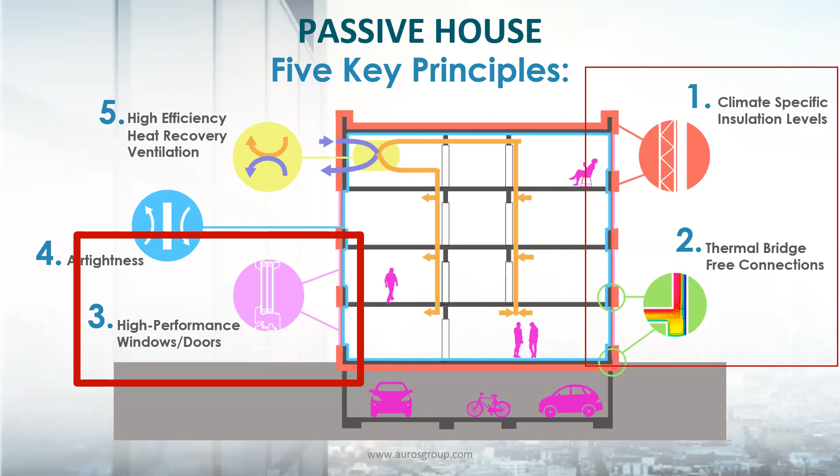And you can see the next ones will be in two weeks and two weeks after that, which will be covering air tightness and then ventilation systems. And we're going to continue the boot camps after session five. We're going to get into PHPP modeling, maybe some subcomponent modeling demonstrations like we did last week with thermal bridge analysis. We'll definitely be getting into some testing, some blower door testing and things of that nature.

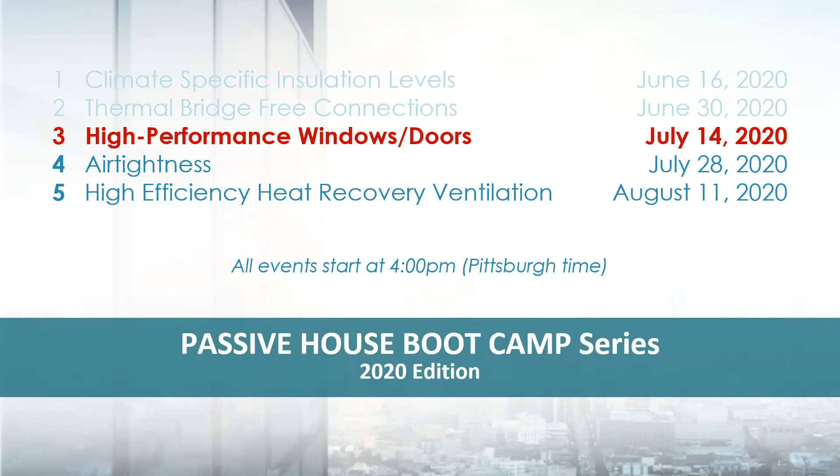Yeah, I mean, our goal here is not to replace the Passive House training course. We're trying to introduce folks to the principles and some of the ideas, let people ask questions mostly, right? We're trying not to do an hour-long presentation.

Chris Hamm is joining us, has volunteered to help us out today. He's from Steven Winter Associates. When we were mulling over how to present windows, we thought we've done manufacturer presentations before, and that's not what we want to do here. We want to talk more holistically about high performance windows.

Chris has this great article. Maybe some have read it. I put it in the invitation to try and spark a little background research and hopefully get some extra questions.

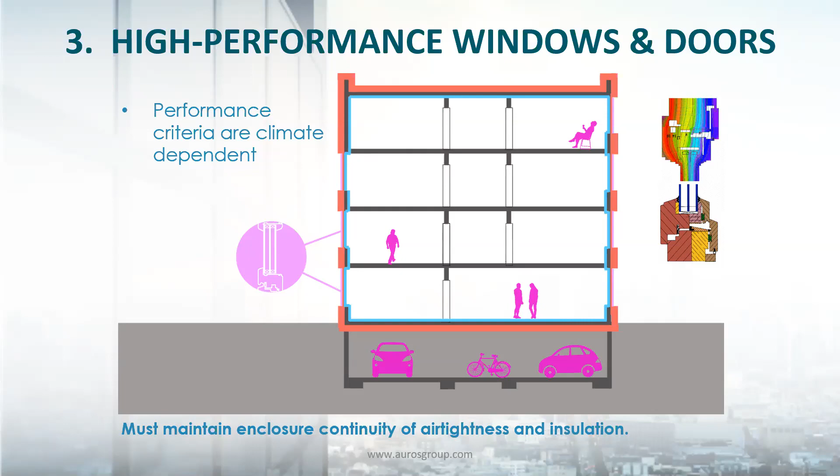Thanks, Jim. Chris, welcome, and thank you for being here with us. Thanks a lot, guys. Can you see my screen first? Yes. And you see the presentation, right? We see it in non-presentation mode. We see the PowerPoint. There you go. Good. Perfect. Great, thanks. So yeah, thanks, Jim and Craig, for having me on.

I'm extremely happy to be joined this week to talk about windows for Passive House construction. I love what you guys are doing here. It sounds like an extremely useful and practical way to get Passive House knowledge out there. So just a little bit of background. I work at Steven Winter Associates in New York City. I am a certified Passive House designer and aspiring mechanical engineer. I've been at Steven Winter for almost 4 years, working exclusively on Passive House projects, mostly large multifamily projects in New York and around the Northeast.

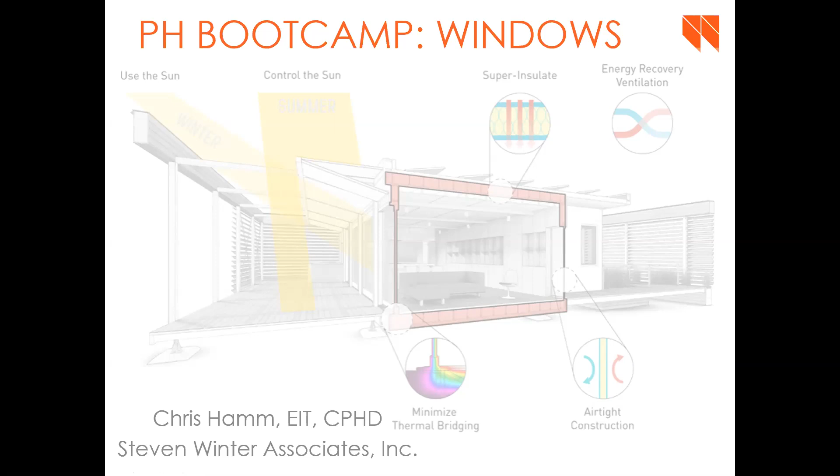A lot of my time is spent doing energy modeling, reviewing drawings, but also doing commissioning and inspecting and air tightness testing during construction. So I'm happy to be talking about windows. I definitely spend a lot of time talking about windows day to day, and we're only going to cover a portion, but we're excited for this discussion.

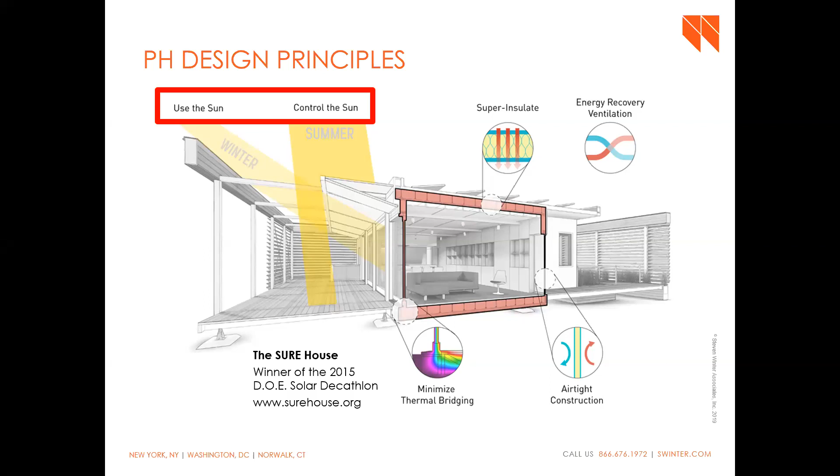But why do we focus on it so much? So we're going to take a step back here. Quick credit, Stevens Institute of Technology logos here. This is actually from a graduate school course taught by Ed May, if you've met him before, who does a lot of the training up here in New York.

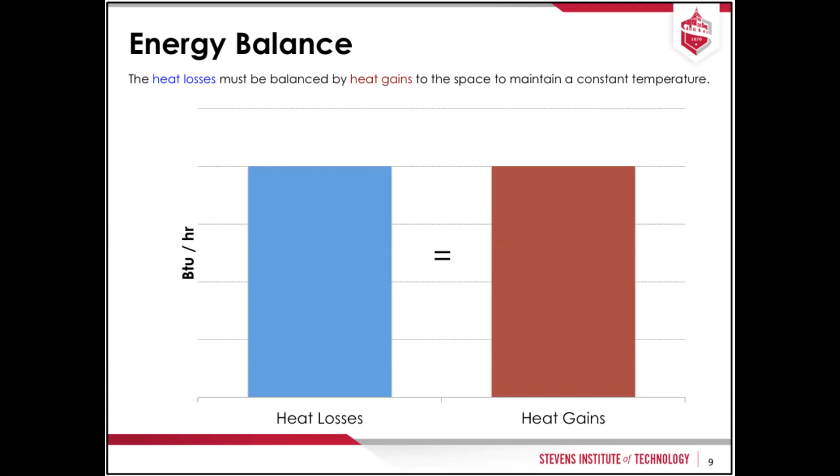When we are designing a Passive House project, and especially in the PHPP, if you're into the modeling side of things, really what we're doing is trying to balance the heat losses with the heat gains in a space, and that's what's required to maintain a constant temperature. Okay, right? I think we all generally get that concept, but that's what's happening when we're designing a building to maintain a constant temperature.

So how do we get heat losses and how do we get heat gains in our building? Heat losses, the main two ways that we think about heat losses are transmission losses, meaning heat conducting through the actual building, and then ventilation losses or infiltration losses, which is actually just air moving out of the building. And so windows play a very big role in that, as you can imagine.

The windows are the weakest part of the envelope thermally. They're going to introduce the most heat loss to your envelope. They, of course, also impact your project in terms of air leakage, and so that also contributes to the losses. But today we're not focusing as much on leakage, although I'd love to come back for another session and talk about that all day. But really what we're talking about today is the heat losses through your windows.

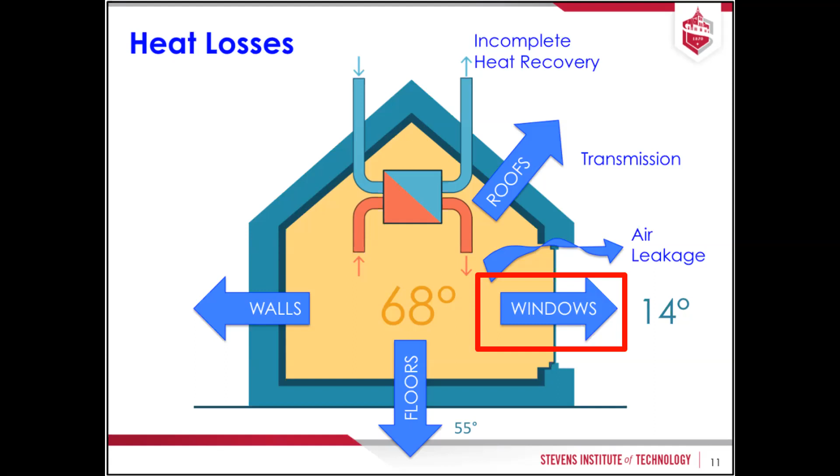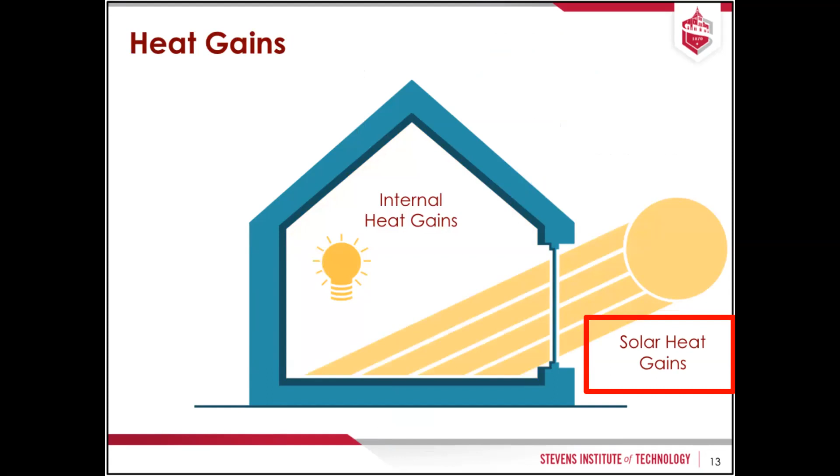In addition, as I mentioned, heat gains: there's internal heat gains, all of the equipment, people, whatever, that's giving off heat in your space, and solar heat gains. So again, how we select our windows is controlling both a large component of the heat losses and the heat gains in the space. So it requires a good amount of understanding early on in design.

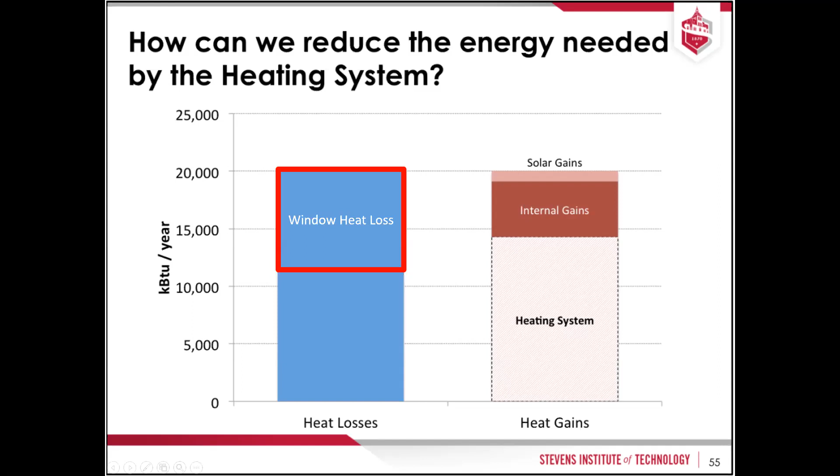Essentially, what we are doing with that heating system is using energy to make up for the extra losses that are higher than our internal heat gains and solar heat gains. And of course, within those losses, a lot of those losses are attributed to the windows themselves. So one very important way to reduce that heating system energy use: decrease the losses and increase the gains.

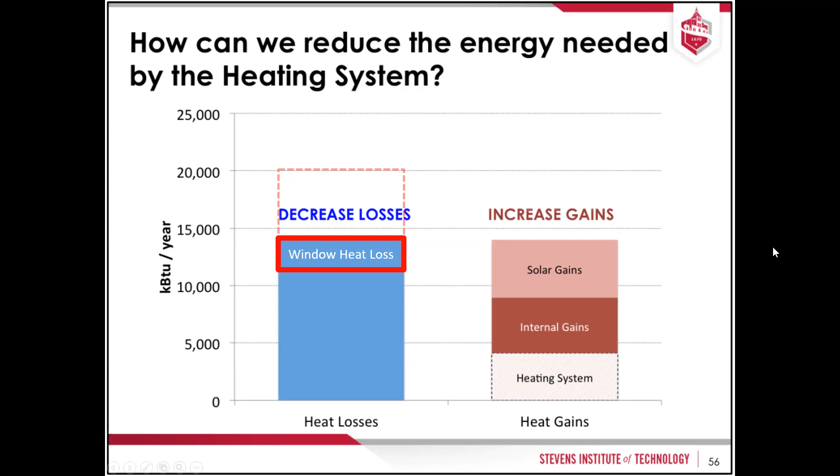Once you decrease those heat losses by choosing, for instance, a very good window, triple pane, highly insulated window, you're reducing those heat losses. If you use a higher solar heat gain window, a well-positioned window where you're taking advantage of higher solar gains, you increase those gains, and those both work together to decrease the heating energy you're using for your building. So that's just to point out how the decisions you make about windows and understanding the metrics behind them can have a huge effect, and why we focus on them so much in passive house design.

So passive house projects often push triple pane windows, the highest efficiency windows that you can get on the market. And I think this is a great graph that illustrates one of the reasons, going along with our heat losses and heat gains discussion. If you look at a single pane window and typical windows used across the industry, the heat losses through that window are typically going to greatly outweigh the heat gains over the course of a year. Again, this is really focusing on heating dominated climates.

But as you get closer to something like a triple low E window on the right here, you can actually get to the point where your gains can outweigh the losses, and that can end up being a net gain for your building and offset the heating energy that you're going to use in the winter. Of course, this doesn't talk about the summer and keeping the sun out, but overall, you can use that to your advantage to reduce your heating energy.

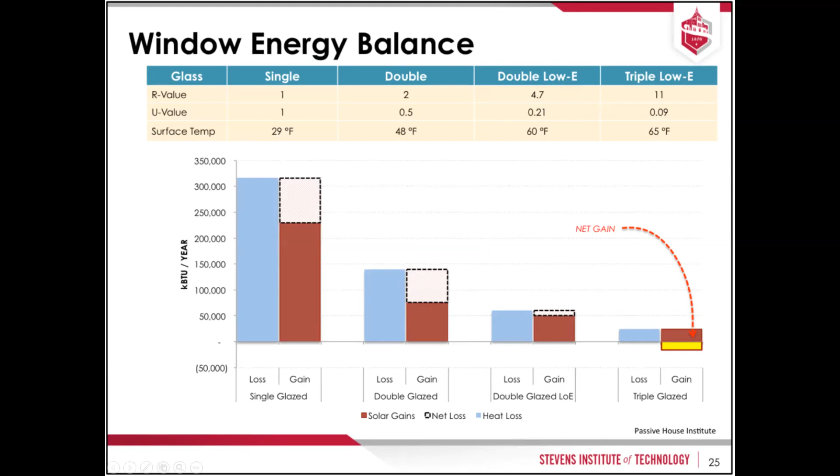So oftentimes modeling will look at which windows are going to be net gains versus net losses, and this is just an example of taking the result from a PHPP and seeing which windows are resulting in net heat gains versus net heat losses over the year.

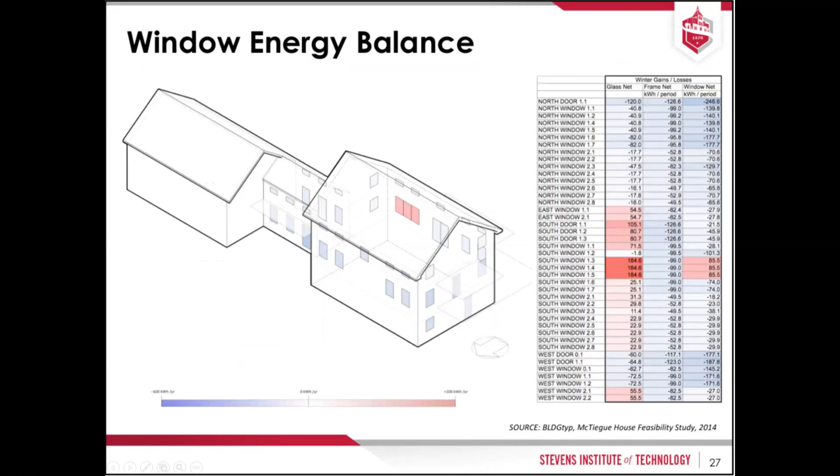So I wanted to start with all that because it gets back to the article that I think Tim mentioned earlier that I had written. I called it "How to Talk About Windows with a Passive House Nerd" is the title of the blog post. Because when I first got introduced into the Passive House community and started learning about windows, I found that it was extremely confusing talking about U values and solar heat gain coefficients, and all of these metrics that are used to define the efficiency of your windows, especially in North America, compared to what is needed for Passive House certification and Passive House modeling.

So this section is going to try and give a little bit of a background, just go back over what a U value is, what solar heat gain coefficient is, if you're not familiar, and then talk about the main standard that we use in North America, the NFRC standards that you might be familiar with, versus the ISO standards, which are typical for and required for Passive House modeling.

So R value and U value: in short, R value is a resistance to heat flow measurement. We typically use this to describe walls, floors, that sort of thing. You're familiar with it in code. The reciprocal of that is a U value, which is the conductance of heat flow. You'll notice that the units are flipped, but it's essentially the opposite, the reciprocal of R value. The lower it is, the better the window.

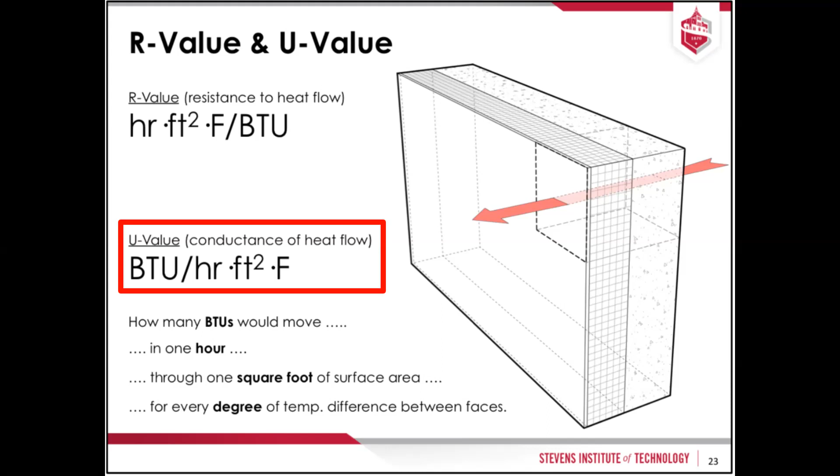We typically use U values to talk about windows. I don't have a great answer for why we do that, but in general, when we're talking about windows, we're talking about U values. It's a heat loss per area. Next, we talk about heat gains with windows, and the way that we describe that specific to the window itself is with SHGC, which stands for solar heat gain coefficient, which is a measurement of the heat, or radiation really, that hits the window that is available to the interior space to actually potentially heat the space.

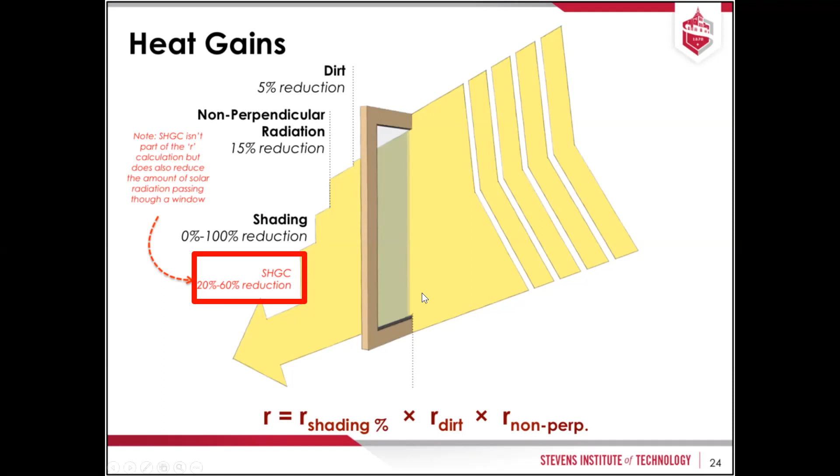Other things, of course, reduce the heat that comes into the window: dirt, radiation not hitting it directly, shading, but those are all separate. The solar heat gain coefficient is something that you specify in the window that you're buying. So we're going to talk a little bit about that today as well. So I wanted to just quickly go back over. We just talked about R values and U values, a description of the heat flow through a unit area. Which we talk about in Passive House all the time, and you probably have gone over this. Just wanted to recap it.

There are what's called thermal bridges, and the way we describe linear thermal bridges is with what's called a psi value, spelled PSI, and denoted by this little Greek psi symbol, which you probably have seen in frat acronyms. It has the same units as U value, except instead of per square foot, it's per linear foot. So that is describing a certain amount of heat loss per length.

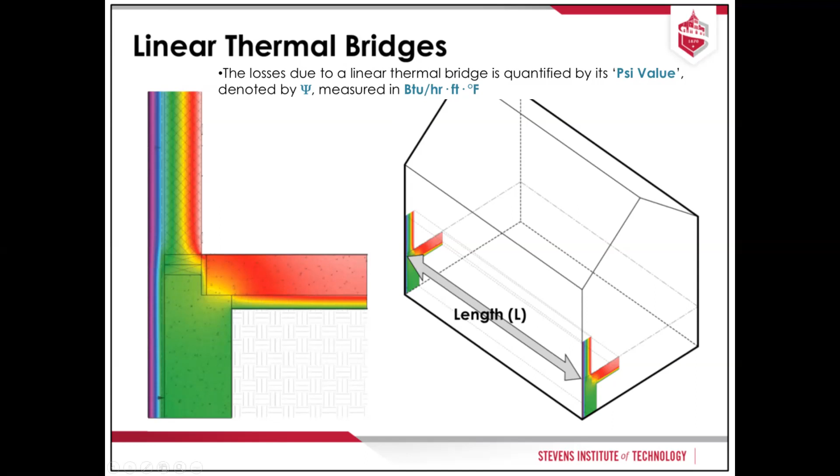And the reason why I'm bringing that up is because in Passive House modeling, we describe the heat loss around windows with not just U values. We use two additional values that the rest of the industry really isn't familiar with, and most people outside of the Passive House world might not be very familiar with these terms.

One is called the psi spacer, which is the psi value that describes the heat loss of the spacer. The spacer is the material that's between the panes of glass that gives it structure. And there's often going to be more heat flow at that point than there is at the glass or at the frame itself. So we have a number that measures the amount of heat loss per length of spacer.

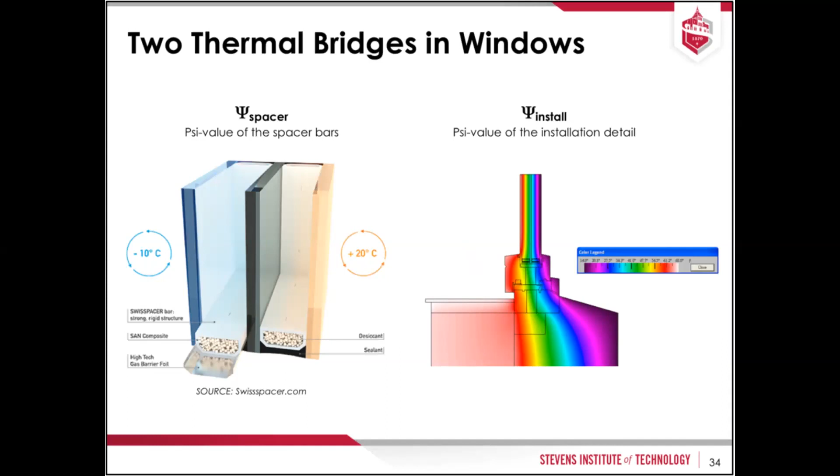Additionally, and this is very specific to Passive House, we have what's called the psi install, the psi value that describes the heat loss at the window frame to wall connection. You multiply that by the length around the window, and that will tell you how much heat loss there is at the frame to wall connection. So it's not a U value because it's based on linear foot.

So everything we've talked about so far is somewhat general, somewhat specific to Passive House, but in the US, if you're a practitioner and you work outside of the Passive House realm, most of us are very familiar with NFRC when specifying windows. This is a typical little label that you'll see sometimes on the window, NFRC values.

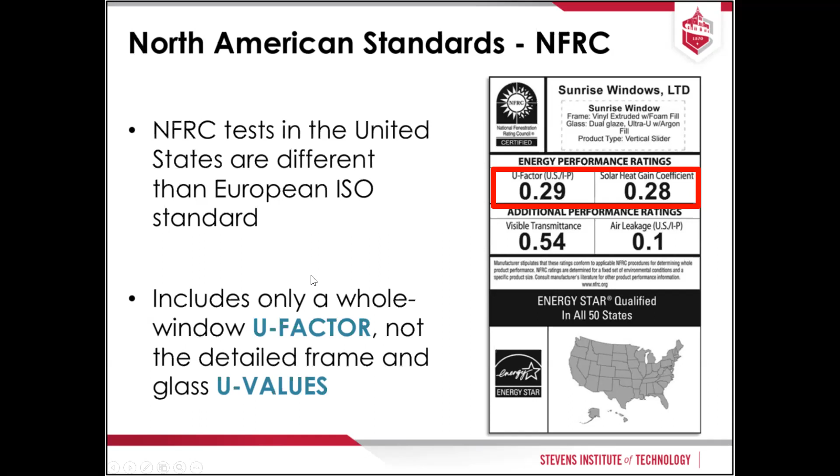And the critical thing to understand is that for Passive House modeling, PHI for Passive House Institute or PHIUS for Passive House Institute US, the values that you use are different than these, and they're certified by ISO, an international European standard. But what you'll typically see on an NFRC label is the U factor, and we'll get into what that really means, and the solar heat gain coefficient, like we talked about before. U factor is another way to say U value, but it's meant to describe the entire window as opposed to each of the individual components.

So let's say you're working on a Passive House project, someone gives you that NFRC data and you say, this is what I need for the PHPP. So this is what the Excel spreadsheet looks like for the PHPP when you are putting in the frame data. You've got your name, you've got the U value of each of the frames, you have a frame thickness, you have that psi spacer number we talked about before, and you have a psi install.

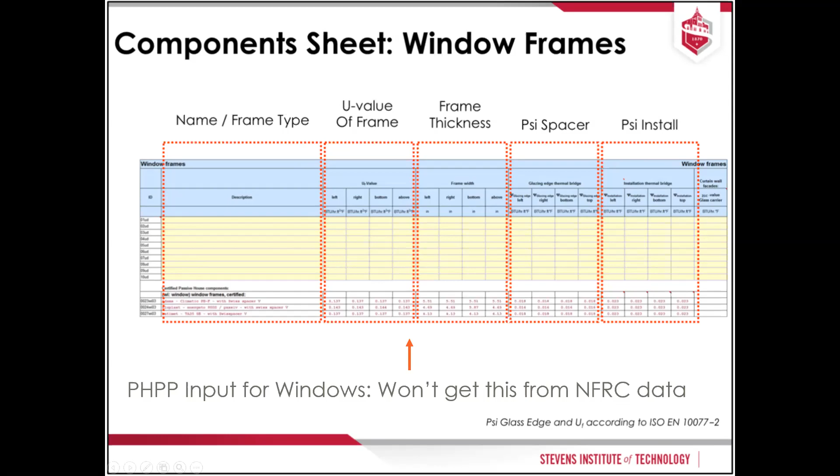You're obviously not going to get any of that from that NFRC data. And so what we're going to go through a little bit is where can you get that data, and how is it different? So this is from the article, and this is trying to just kind of highlight the differences between NFRC and what's called ISO, which is what's referenced for Passive House modeling.

So NFRC, the way that U factor that we saw on the previous label, which can also be referred to as a whole window U value, is calculated by essentially calculating the U value for different components of the window and coming up with a whole window area weighted average. So they get the U value of the frame, they get the U value of the outer 2 inches of the glass, because the heat loss is going to be different there than the center of glass. Then they get the heat loss at the center of the glass. And you kind of add those all up together and divide by the total area. That'll give you your total window U value.

ISO in Passive House does it a little bit differently. Specifically, there's no kind of glass edge area calculation. Instead, we have the psi spacer, like I mentioned before. So it's a slightly different way to calculate it, but all that is to say is when you're looking up NFRC data, you're not going to find that psi spacer value because it's not used in that calculation.

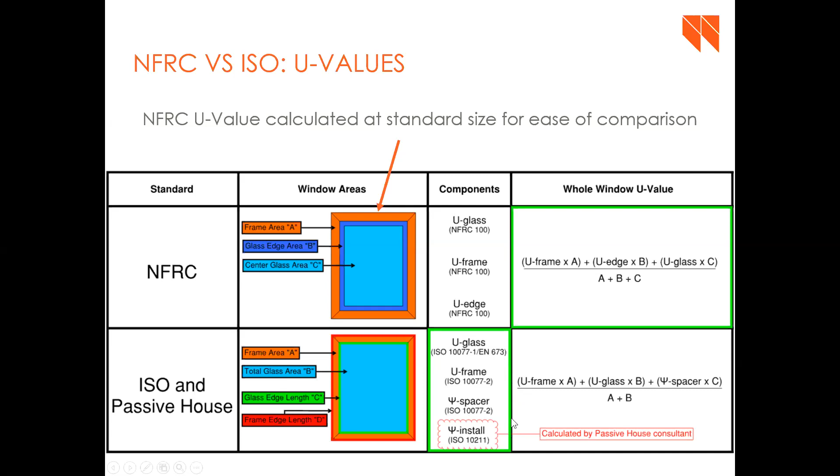Finally, marked out in red here below is the psi install, which is specific to Passive House modeling. So these 2 boxes that I've highlighted in green are meant to show you that NFRC will only report that one value for the most part, whereas ISO will report all of these different values. And I'll get into it in a minute why that's important.

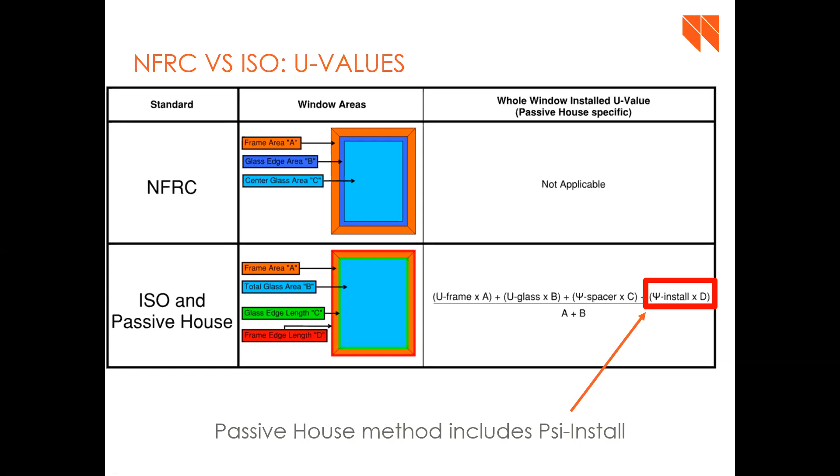So this is just building on that, the addition of the psi install, that additional heat loss at the frame to wall connection, that's specific to the Passive House modeling. It's basically trying to be even more conservative compared to traditional energy modeling and capture that heat loss between the frame and the wall. So that was U values and psi values. And now let's talk about solar heat gain.

So NFRC talks about solar heat gain similar to U value, usually as a whole window value. A lot of times you will see this presented as just an SHGC, and you need to understand whether or not it's a whole window or just the glass, but usually it'll be the whole window. The reason why that's important is because it includes the frame and not just the glass. For ISO in Passive House, it's actually technically referred to as a g value, not the whole SHGC. But that is measuring the solar heat gain just through the glass.

So that's something to understand right from the get-go, is that the value used for Passive House is just the glass, whereas NFRC is usually including both. So as you can imagine, frames, which are opaque for the most part, don't let sun go through them. If you're including that in the area that you're evaluating for solar heat gain, it's going to greatly reduce the amount of sun that's coming through. So those values can be very, very different and should not be directly compared.

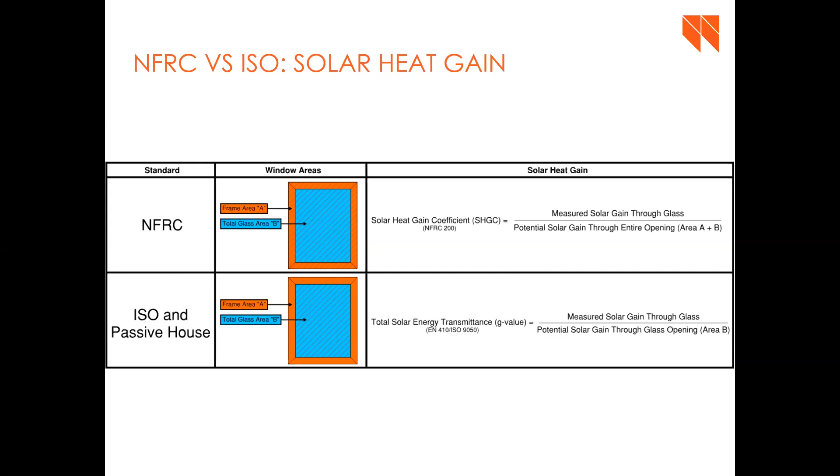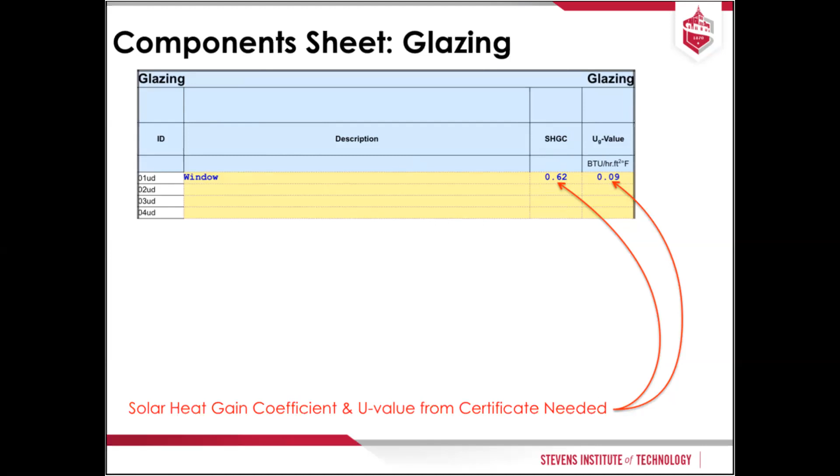So why do these two distinctions matter, and why does Passive House use ISO specifically? We'll get into that.

Going into the Passive House model, you have a few different kinds of U values, and the psi values. There's the U value of the glass, the U value of the frame, and the U value of the whole window, which is an area-weighted value including both of those as well as the spacer. Then there's UW installed, a U value of the window that includes that psi install value—something you won't see referenced outside of Passive House modeling software, but ultimately is what's used in the heat loss calculation in the model.

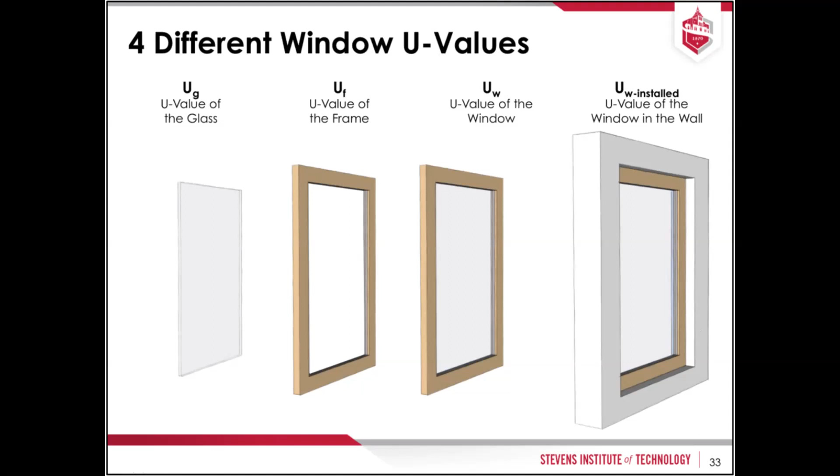The reason Passive House breaks it down into those different components, and why it's so important, is because it gives you the flexibility in the modeling to account for the amount of frame relative to glass.

One very important point is NFRC standards define one U value for any window. But what you miss when you think about just one U value is that windows can be all sorts of different sizes, and if you're including the frame and glass in one number, you can only come up with one number if you define the size. So NFRC has done that—they've defined specific sizes for operable, fixed window, storefront, so you can easily compare between different products. That's the point of it.

But for energy modeling purposes, it's not very helpful, because if you have a window with the same UF (U value of frame) and the same UG (U value of glass), but different widths, you end up with very different overall window U values.

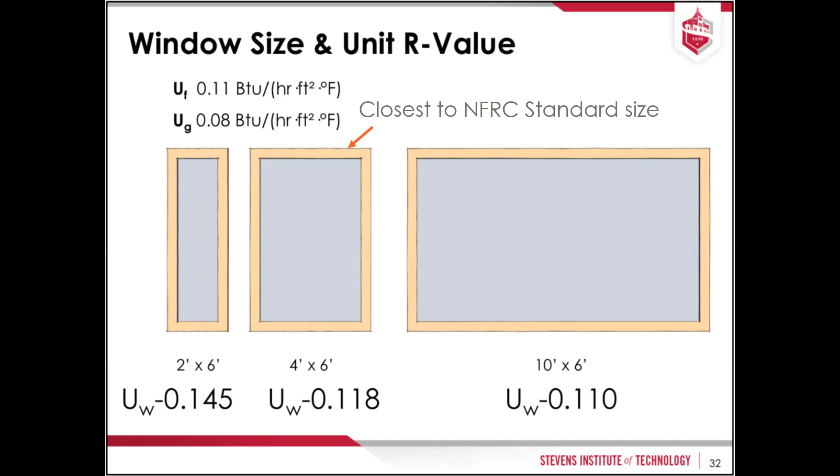The reason this is important is if you were to specify an SHGC of 0.3, you might end up having a much lower G value than you'd expect for your Passive House modeling. So it's hard to make a good comparison between ISO and NFRC.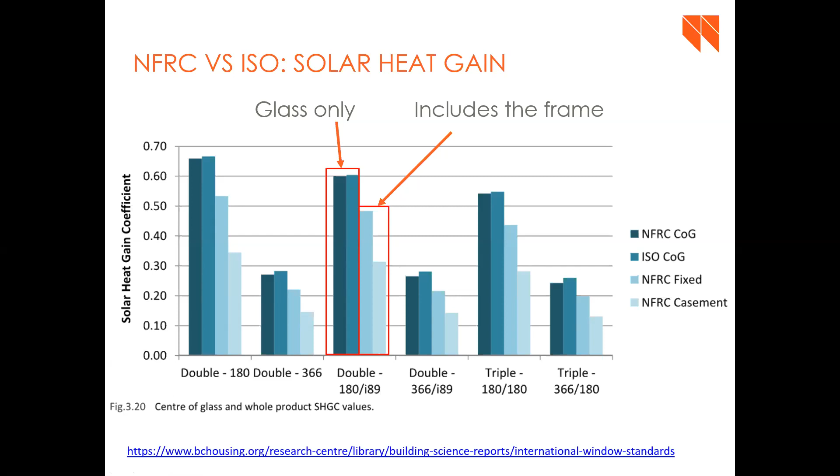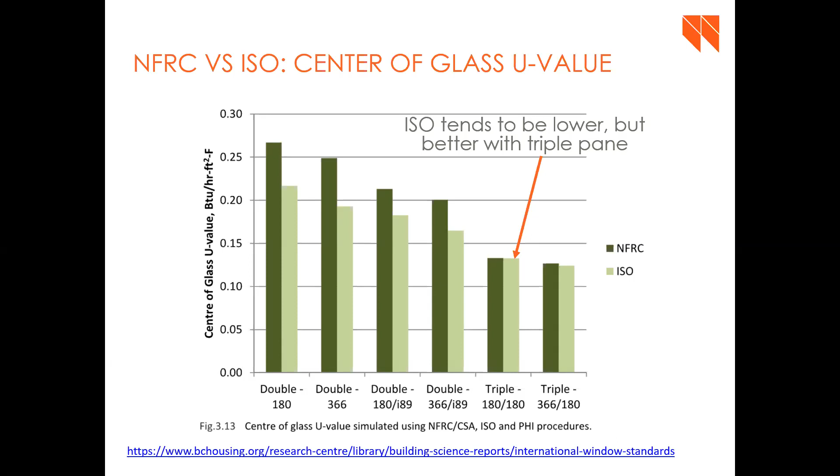So the component database, just to take a step back, Jim, Craig and I talked about wanting to step through this quickly because basically both Passive House Institute and Passive House Institute US have programs for certifying windows for use on Passive House projects. So what does that mean? You could talk all day about how they go through this process, but long story short, they have verified certain products that meet standards that they have set.

Usually it has to do with the U value and the air tightness of the frame, at least. They've determined that it's usable for Passive House projects, and they actually provide a cut sheet you can reference for your modeling, giving you all those values, the U frame value, the spacer value, those types of things you can use in your modeling, which is extremely useful.

One thing I'll clarify is that these are not required. You're not required to use Passive House components to be certified. However, it does make certification much simpler, because there's less vetting that the certification body has to do, but also it gives you the values right there that you can use. And there are a good amount of options.

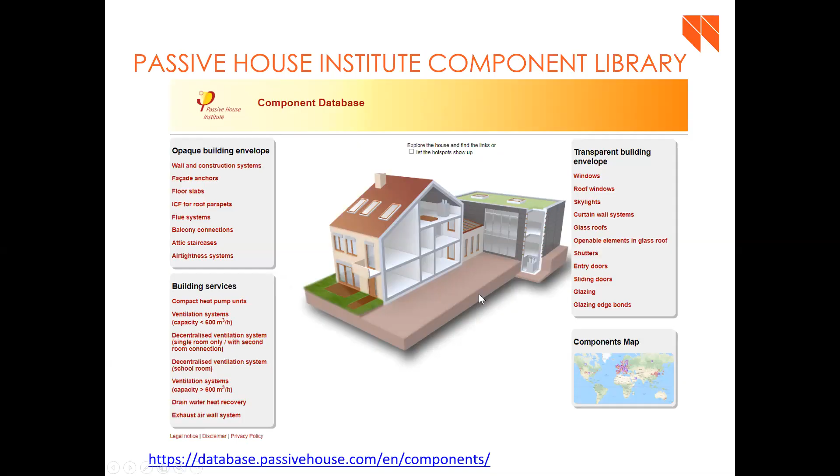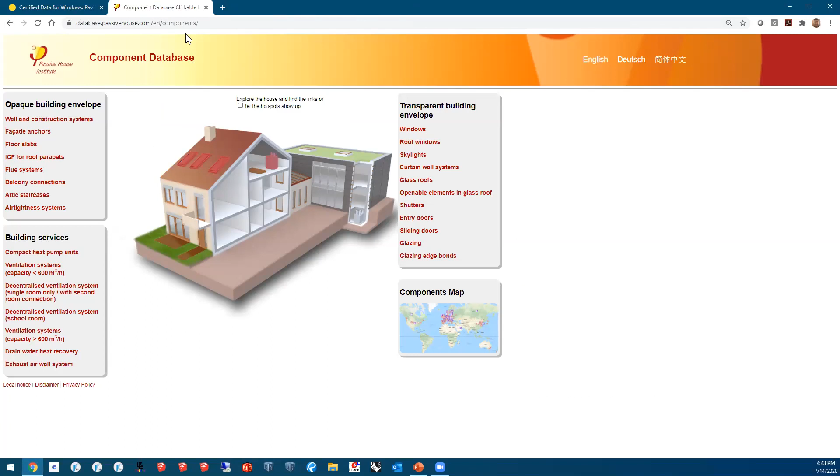So let me switch out of presentation mode, I have it pulled up here. The Passive House Institute in Germany has this component database. I usually just search Passive House Institute component database. Similarly, Passive House Institute US also has a component database. I'll first show you the PHI one. You get into this, it's a clickable house, kind of cool. You can click on the component you're looking at. Usually I just go straight to Windows over on the side.

And then it gives you this list. I will say it's not the most, at least the PHI one's not the easiest to use. I usually do just a Control F if I'm looking for a particular manufacturer, but you can always just scroll through it, find a manufacturer, and then I'll show you.

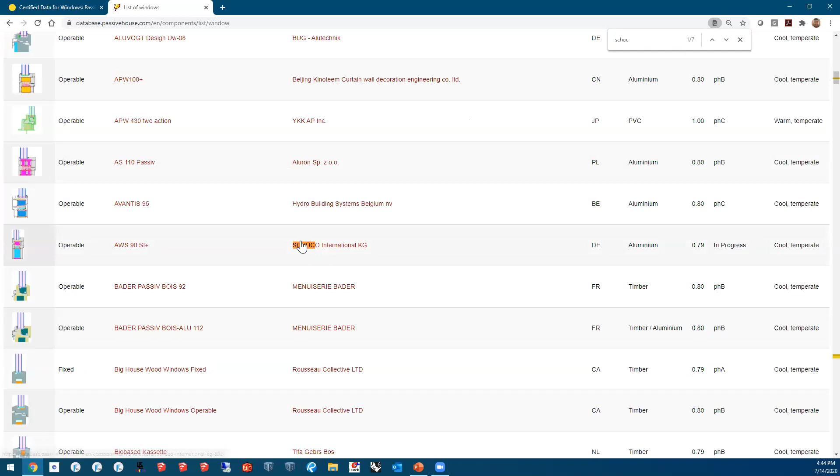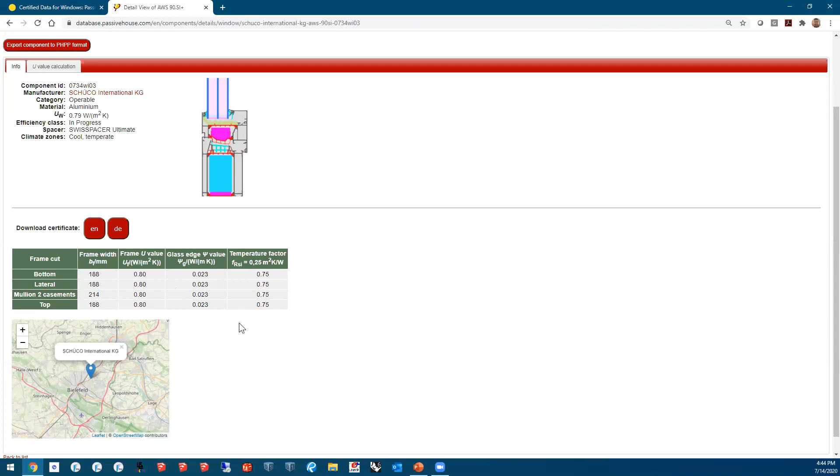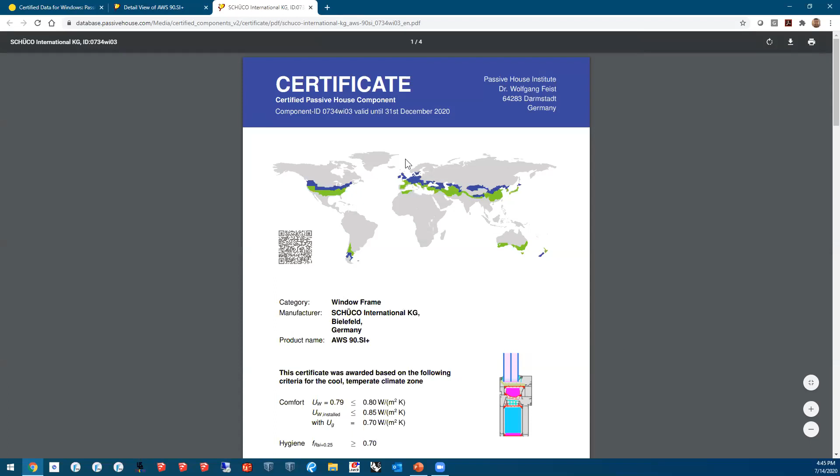So Schüco is a brand that we've used a lot. You find the manufacturer, you can click on the name, and it pulls up this information here. It shows you the profile of the frame, and it shows you these values, which align with the inputs of the PHPP like we were talking about before. Then you can click here and download the certificate, which you would ultimately want to have for certification. You can see it shows a lot of that information, and then you use these values in the PHPP.

I will say with the PHI components, it will be in SI units. So you can see here millimeters, watts per meter squared Kelvin, which requires you to convert it. But the PHPP gives you that functionality, which is useful.

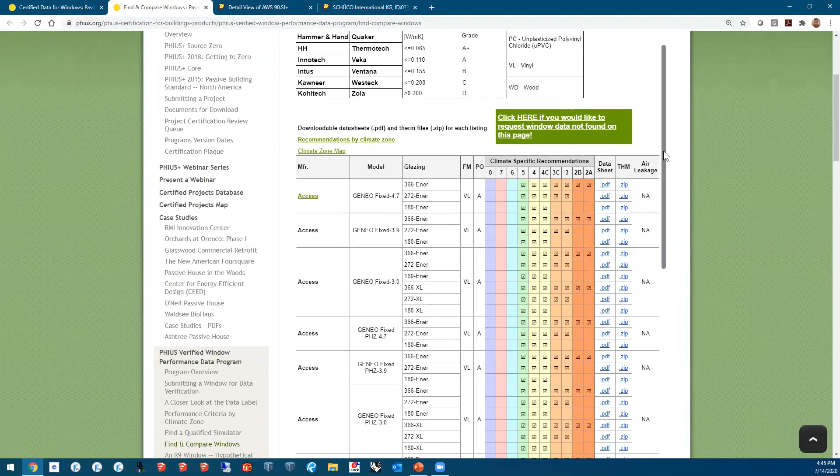So PHIUS, it's very similar. This is Passive House Institute US. Go to component database, at least I searched that and it brings me to this page. Go to find and compare windows. They have a pretty similar, but pretty cool setup here where they've got the manufacturers on the left, the actual model, and the glazing type. So you can get as specific as the frame model and the glazing type. And then it shows you which climate zones it's suitable for, or where it would be suitable for Passive House certification to be used.

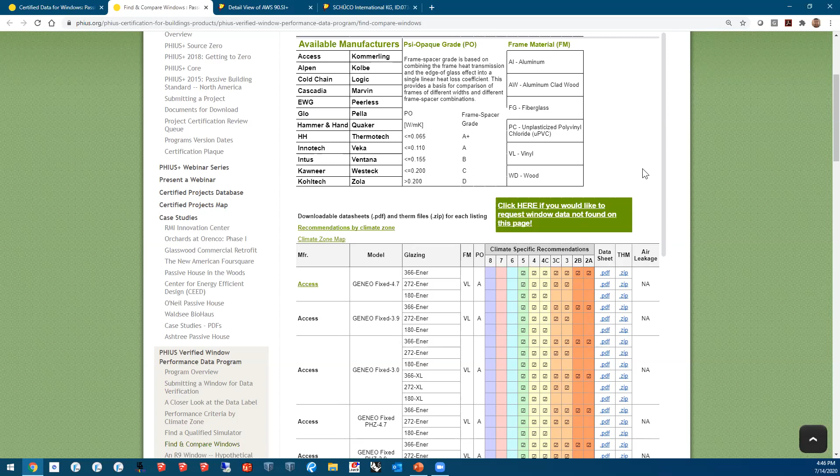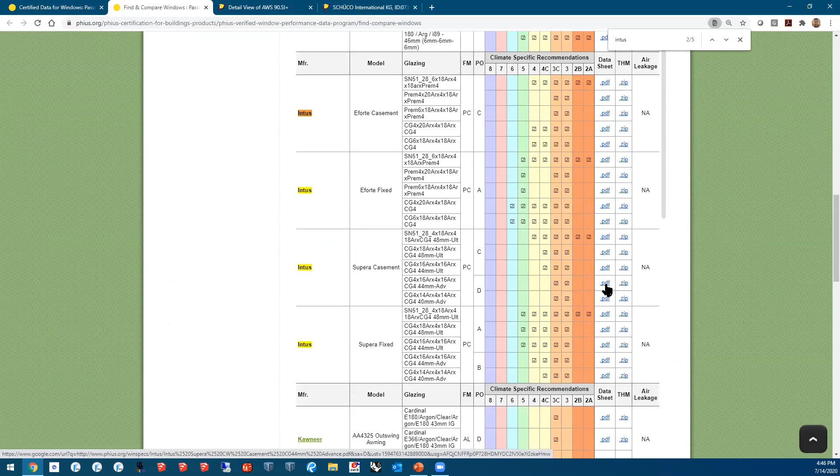So one that we are familiar with using a lot is Intus. Again, it does require you to have an idea of what glazing you're thinking of using, but if you're starting out, you can kind of make a guess. Then I go over to the right and I click on this PDF, and it pulls up a similar sort of certificate, and it's of course laid out differently, has different units, but ultimately has a lot of the same information.

One thing that is kind of nice is that they give these results for different U center-of-glass values, but really what you're looking for is the frame information. So you've got the frame height, that dimension there, the U value of the frame, and then that psi spacer value. Those are really the three main things you will end up needing for your window frame to put it into the PHPP. What's nice too is they give it in both SI and IP units.

So that's just a quick overview. What's important about these is you can see here, it's calculation based on ISO 10077-2, these different standards, which are the ISO standards that Passive House references for the energy modeling. So it just makes it useful because you know what you need.

So while you're on this page with these two different databases, can you talk a little bit about if a project team just doesn't like that window or the windows in the database? What happens when you go through certification for PHI, for example, when you use a non-certified component or assembly? How do they go through the discount? How does that work so that our audience knows that you're not beholden to the database and you don't have to use that?

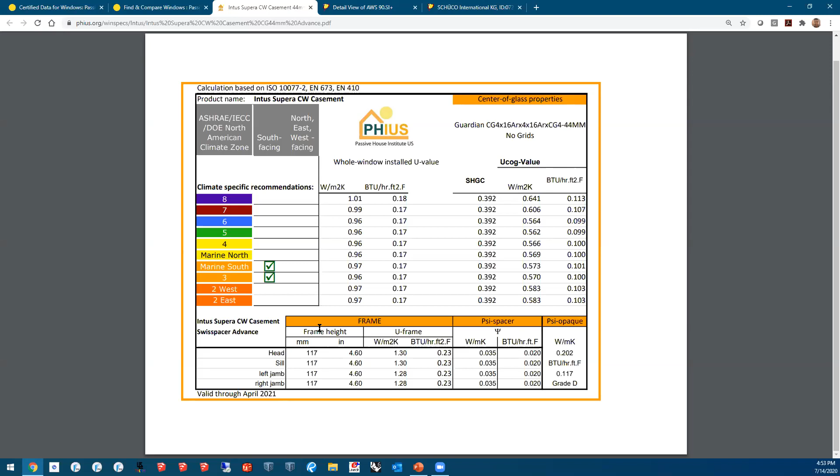Go ahead. Yeah, I'm curious, Chris, obviously we talk a lot about very specific requirements, specific glass assemblies, specific target SHGC and various performance aspects of the glass. Any tips on how you're specifying in open specs or jobs that are going out for competitive bidding, to make sure you get the performance you're looking for in the model, but also hopefully keep it open to competition?

Yeah, let's see. So when we do a spec review for a project, we've already done a good amount of energy modeling at that point. Well, there's two different things. For solar heat gain coefficient, we'll often give a range. We'll say, don't go higher than this and don't go lower than this. And they'll put that in their specs. They'll say, this is what we want for our glass.

So that gives you a little bit of wiggle room, because like you're saying, it can sometimes be hard to dial in a piece of glass to have the exact G value that you want. So giving the range with the solar heat gain is good. And then for the U value,

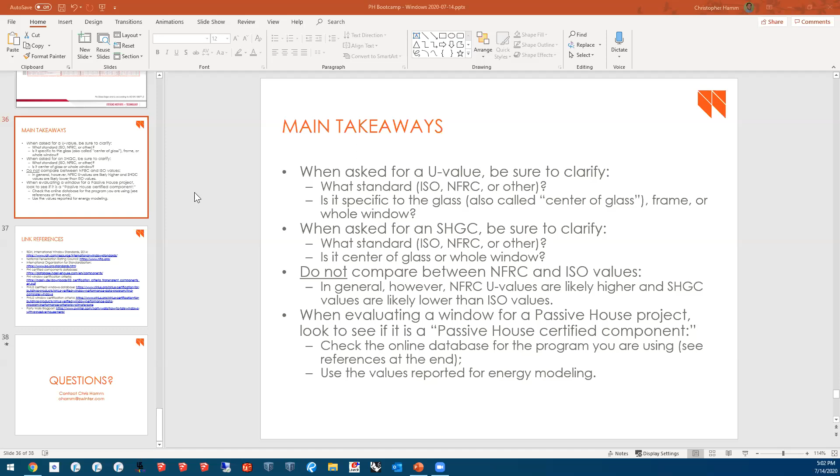Yeah, storefronts, you'd be surprised. A lot more. On the PHI database, I believe there is a whole, let's see, where do we got it? Curtain wall systems. They at least have curtain wall systems. Do they have glass walls in there? I don't know. A lot of times we just take the hit on the storefront with double pane, because you have to, and then you compensate for it elsewhere.

Yeah, we have had projects do triple pane storefront, but a lot of projects often do double pane. That often will work with Passive House Institute in the comfort criteria, because it's not in a living space, and you often will have some sort of perimeter heating around it. So yeah, that is definitely somewhere where we see more and more double pane. But that's kind of assuming it's not in living spaces and whatnot. It's more in the lobby and that sort of thing. What was I going to say?

That's true. Unless you have sliding doors for balconies or something like that in some multifamily. Yeah. But we've seen those as triple pane, and there are passive house ones too. But in terms of Passive House Institute, they're more worried about if it's near living space, or is it in a lobby or something like that. They're more concerned with the thermal comfort than the energy performance. Yeah, exactly. You could seal them up just as tight as you can a punch light, but you're just going to lose it on the efficiency side. Yeah.